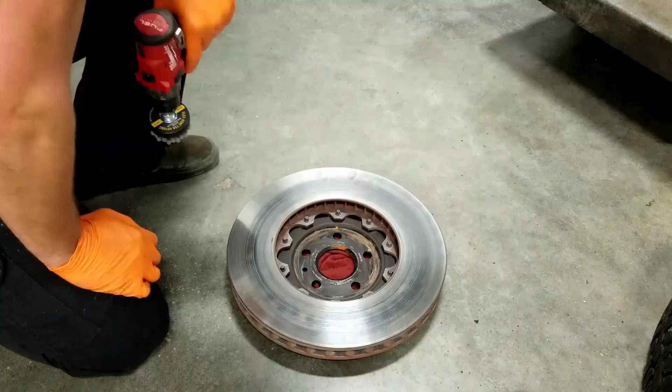All right guys, so we can see what in theory are these uneven pad deposits around the rotor. Now, you can't really feel anything — it feels relatively smooth, not grooved up, but you can at least see it.

So we've got this flex hone, a brake rotor hone, and we're gonna see what happens. I've never done this before, so we'll be learning this together, I guess. Let's see what happens.

Guys, in theory we've got a bunch of black deposits here, and it's not from the gray material, so I'm assuming that's our brake pad deposits we're scrubbing off. I don't really know how long to do it, but we've got a decent non-directional pattern. I'm going to make a few more passes, then flip it over and do the other side.

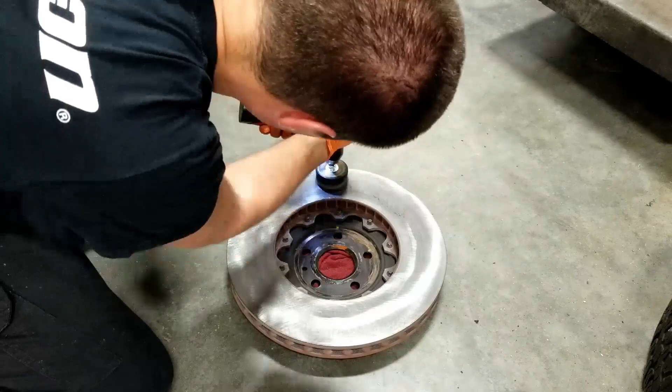Well guys, I guess we'll see if that's enough honing to get off those brake pad deposits. Obviously I need to throw this rotor back on and go do the other side, but I'll know pretty much immediately because it would vibrate even during normal street driving with light brake application.

So let me get the other side done, get the oil filled up, the diff filled up, and then we'll throw it on the alignment rack. Hopefully that was enough for the brake pad deposits to be off and for it to be smooth again, but I guess we'll find out.

So guys, what we're ideally hoping to see is our camber and caster still where we want it, but the toe out. That would be the best case scenario to explain why our steering wheel is off center. Because if we've got camber or caster out of spec, that means we've got bent parts from jumping the curbing. But if we just have toe out, maybe the rack shifted slightly. Toe is a lot less worrisome than camber or caster being hard parts that have bent, moved, or shifted.

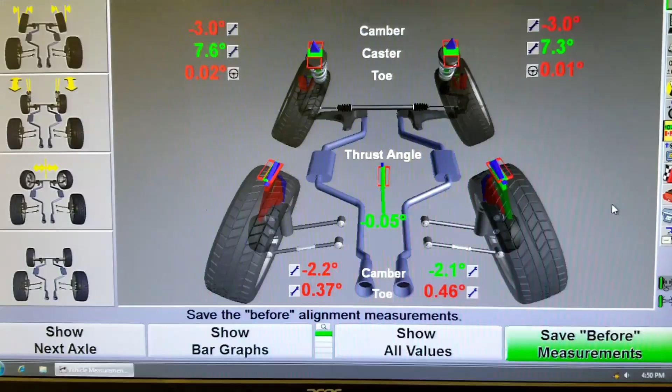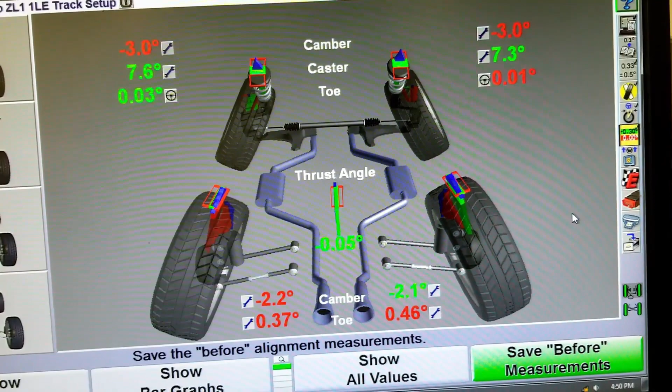So let's take a look at the alignment specs currently and figure out what we need to do. As we can see, our front camber and caster is right where we need it. Our toe is slightly out, so obviously we've just got to get that dialed in. Now our rear toe is a little bit high too, so we will need to pull that back down to where it needs to be, but this is best case scenario—front camber not being bent, broken, or something horribly wrong. We'll go ahead and dial in our rear toe and then our front toe, and we should be good to roll for the season.

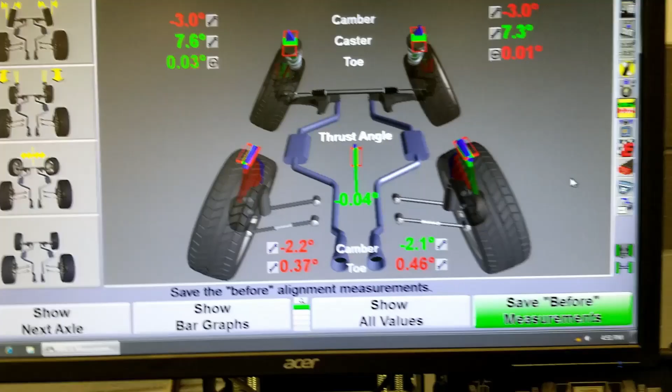So let's get this thing off the rack. We're gonna go out and get it on the street and hope the brakes are now perfectly smooth with the honing that we did—never done that before, so let me get it off the rack. We'll go out and drive and see how it feels now.

All right guys, we are leaving the shop, getting ready to jump back on the highway, and hopefully our steering wheel is straight. We're not pulling to the side, and hopefully when we hit the brakes we aren't shaking all over the place, because it was really bad. Definitely not confidence inspiring when you're on the track diving into a corner at 130 mile an hour and your whole front end is shaking. So hopefully that took care of it.

Now, from my technician feeling, to me that was warped brake rotors, but everybody told me that was brake pad deposits from getting the brakes hot on track, braking, cooling—using the car how it was intended to be used. So we'll see—was the internet right, or am I right and they're still going to be warped and I'm still going to have to turn them. But hopefully our steering wheel is straighter.